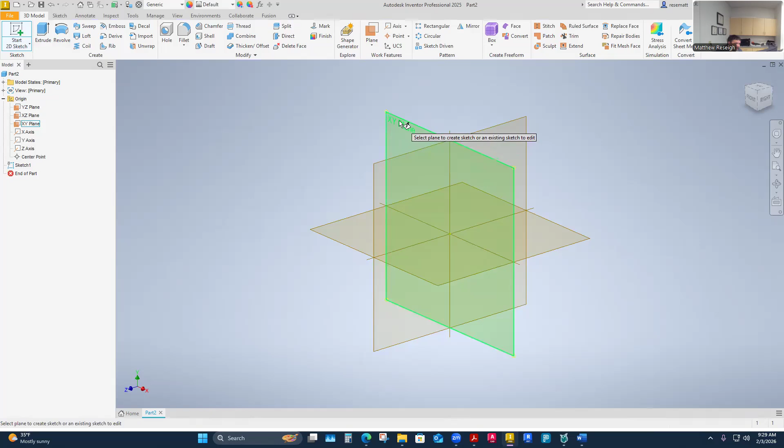I'm looking for the XY plane sketch. I noticed that when I do that, it just started that sketch, and then my planes turned off. So that's cool. That's great. Just so you identify where in space you're modeling. I'm going to do this rectangle, which is just a 1x4 rectangle here. So four in this direction and one in this direction.

So 1 inch is a really small coupon, by the way. That's not very much material. Usually when welders practice, it might be something longer, like a 4x6 or a 3x6, and then they'll trim it down a few times. You can still weld this, but I'm going to constrain this in space here. I don't think he does this in his video, but this is what I always do. I'll do a horizontal constraint to middle, vertical constraint to

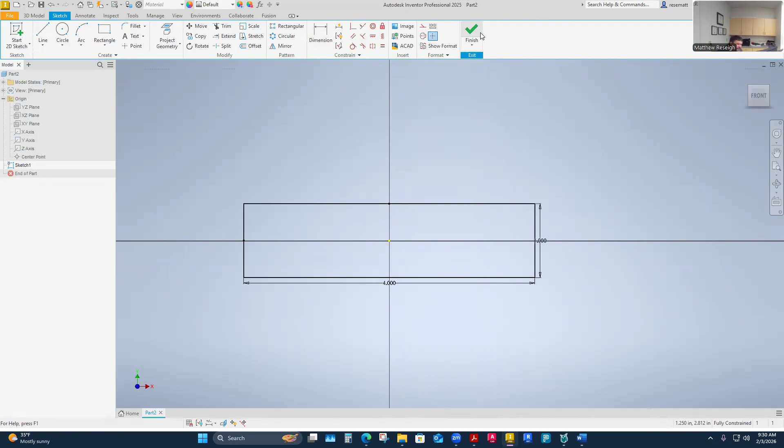there. And that's just a 1x4 rectangle part. I've constrained it, finish it. He extrudes it 1/16 of an inch. Really small part as well. It's like sheet metal. So he just extruded this 0.0625. That's 1/16 of an inch. I'm going to put this centered over my planes here on my extrusion, so my sketch will be buried in the middle. And just so you know, this is 1/16 of an inch.

So sheet metal, and we talked about this a little bit in some of our chapters, at 3/16 thick is kind of where sheet metal turns into, I think it's technically maybe 1/4 inch, like 0.25 in thickness. From that point on, maybe the steel distributors think of that as plate, and maybe 1/4 inch and under, but really 3/16 and under is sheet metal, and it's definitely formed differently in manufacturing.

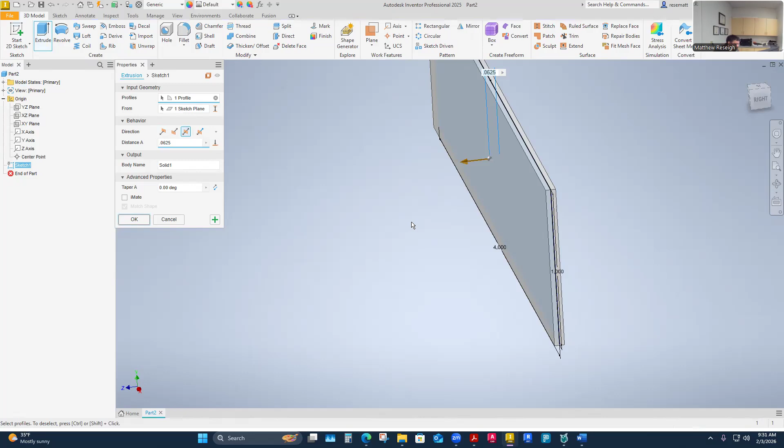For sheet metal, I can get even different finishes. And so he's in a sheet metal realm here, even though we're in a standard part. When I see something that's 1/16 of an inch thick, that is sheet metal to me. It's really thin. Okay. Why this matters is because if we think about welding, these things matter. And so he just makes this one part, and then he saved it. We'll just save this, this is in week 4 for me.

Just so you know, week 4, I have these 3 subfolders, which is, I think I've mentioned, how I build my folder structure. I go into my week 4 and I have an assemblies folder, a drawings folder, and a parts folder. Anything I do in week 4, we'll have several different parts. I'll just dump them all in the parts folder. All my assemblies for these little weldments will be in the assemblies folder, and I'll have the drawings for each of them in their own folder.

So you get quite a few different assemblies and parts, and it can be kind of hard to organize or find which one's which. But I saved mine in my parts folder, and this was exercise. I just called it part 1. I have to just change mine slightly, put some designation so I don't lose it as well.

But part 1 for this, and then we're gonna open up a new type of assembly, and it's a weldment. Instead of the standard assembly, we're gonna use a weldment, although it's very similar. This is an ANSI weldment. Create it. It doesn't look too much different, other than by default when it comes in, you'll be on the welding tab. So it adds that one tab above your ribbon menu.

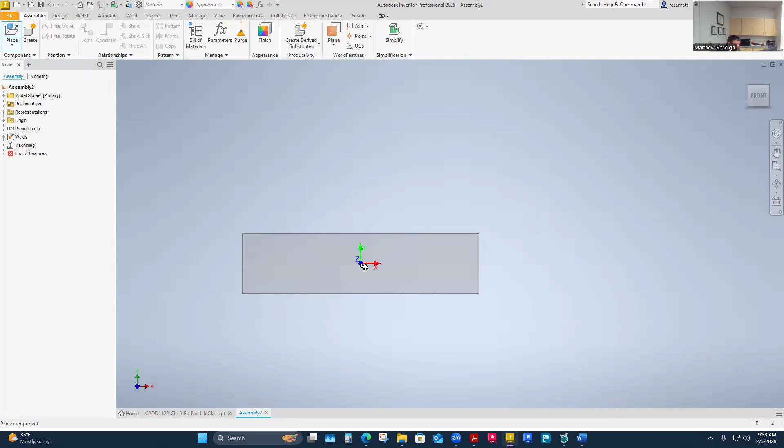We end up placing 4 of these because he ends up making kind of 2 different weldments in one here. So I think he places 4. If your assemblies are like mine, I like to turn on my shaded with edges here. He doesn't ground and root anything or even place one. He kind of keeps them free floating in this model space. That works for me too.

What we want to do is just join them together to make a T. And so he makes T fillets out of here. And so that's why I feel like the next thing you should think about when welding is kind of the joint designs. And this is considered like a T joint. And then maybe, if you wrote it out, it'd be like TE joint or something. T joint.

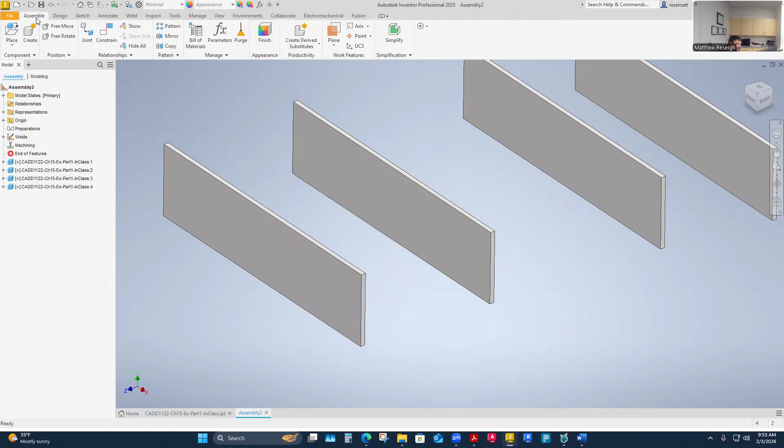Why do I need 4 of them? Because I'm gonna weld them. We're gonna act like we're gonna weld these together, and we're gonna make like 2 coupons, is what I kind of call this. So what I'm gonna do is I'm gonna assemble these. I'm gonna constrain these, and so I end up putting like one of these edges.

You can pick any of these parts, by the way. So I'm just gonna pick one like skinny edge here, and I'm gonna mate it to the face of this one. That's essentially creating the T joint configuration. Real standard way to join metals is like to T them together, just butt one into the other, but one's face to edge kind of. That's a T joint.

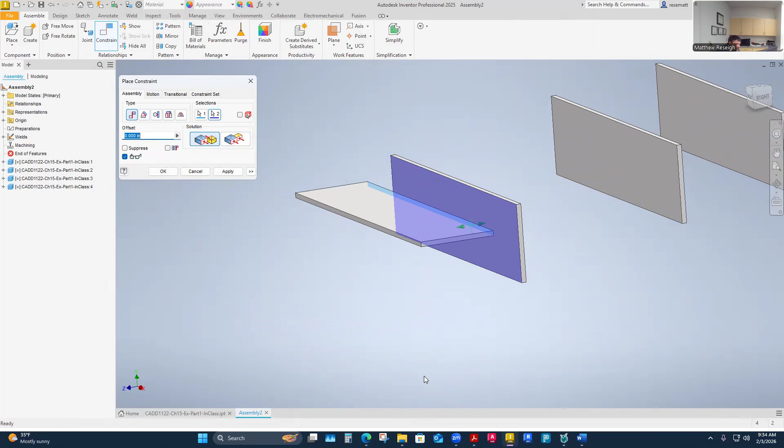Say okay on this one, I'll apply it, and then we just line them up end for end here. Of course, they need to be flush. I'm going to change that solution and say apply. And then he aligns his with a dimension. I just end up aligning mine plane to plane here.

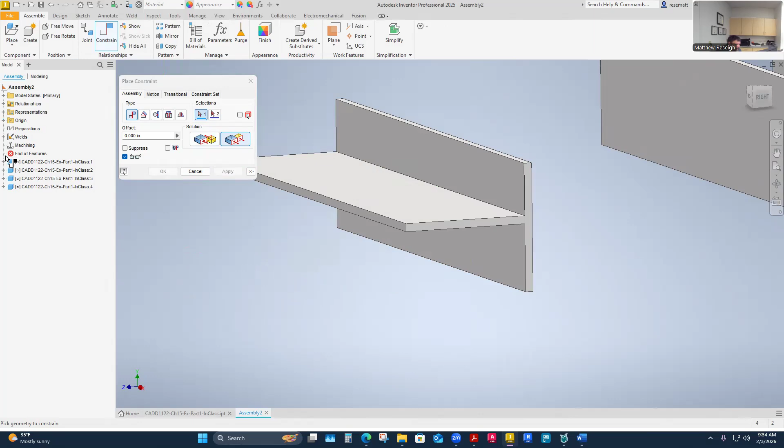So I think the way I've done mine is, let me just blast that. It's just whichever parts I'm working on, which I can identify really quick in my list. This one, maybe I just want to know its origin planes, and this one, its origin planes. And I know I have a plane to plane relationship that will align these up centered. Like there's my center plane there. And I'm going to apply it to this one here. That's the center plane of that one. That's just because I constrained them in their environments that way.

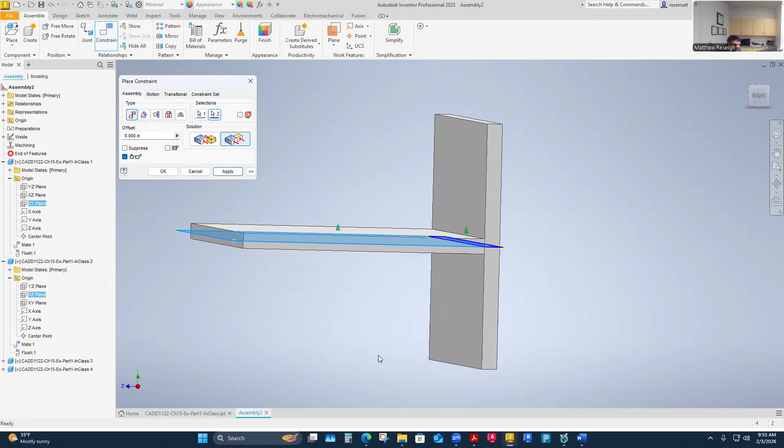So I have these, maybe they're going to be flush. Got it. Okay. I think he uses a dimensional constraint. I just chose to use a plane constraint, so it's actually centered. So it is like for my last constraint, that is. I identified from my list which ones are which origin planes I need. And I'm just constraining this plane. It's like the thickness plane right here. I have a center plane in this one right there.

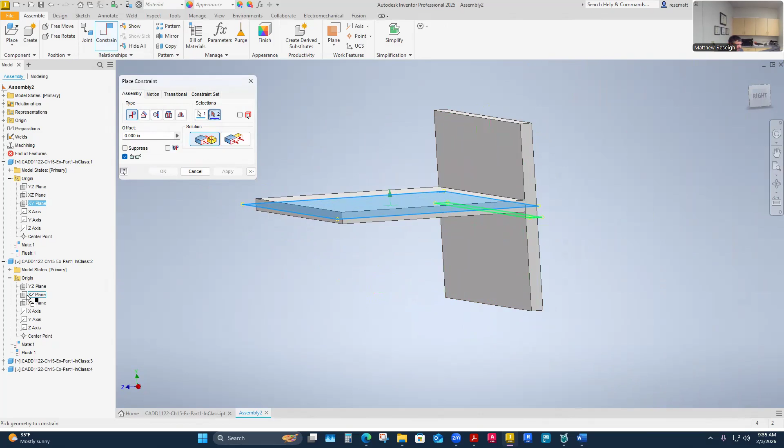And then if those are flush constrained, I can just hit OK. And now these two are constrained together, but they're not constrained in model space, right? Oh, try the other solution. Always say edit that. Like if you always get the conflict, just say edit and then go in and choose a different solution. And it probably is just needing to be the opposite one that you have. Yeah. Don't delete those. Just edit them.

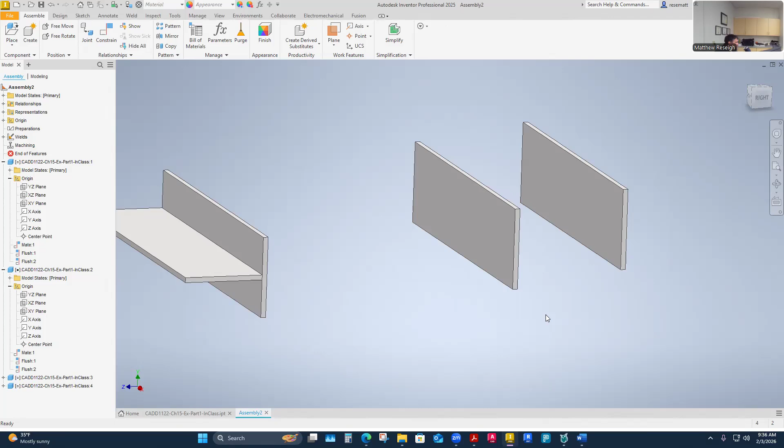It'll even allow you to force it to constrain, but then you'll see that the constraints will blow up and it'll make you want to have to fix them. So you could still apply that, even if you know it's right, but you're going to fix another one to actually make it right. You can just force a constraint and then fix the blow up, if it's conflicting another constraint and you want to change that one instead of this one. I mean, that gets complicated.

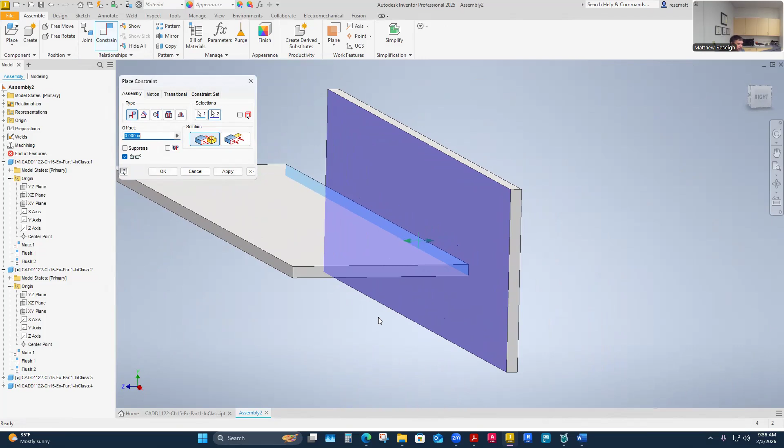And I'm gonna do the same thing. I'm gonna make the same little configuration with this set of coupons. This is what a welder would do in their little booth while they're practicing. They'd have to cut flat strips like this and then create the joint they want to practice welding. And this is a real common joint that welders practice. Like some of your first welding might be this, it's going to become a fillet weld, is what we're going to call it. I'm going to apply this. It's a T joint, but we're gonna perform a fillet weld.

And I'm going to line these up end for end flush, apply that. And then I'm going to do my constraints here. A lot of times I'm expanding out my selections here. If I right click and say collapse all, I can itemize my parts a little bit better and then expand the ones I really want to work with, these two.

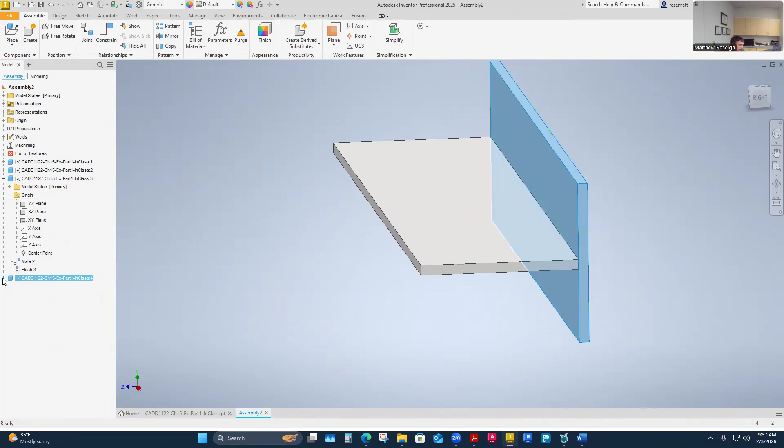So I have the planes exposed. And now when I constrain, I can look for the one to pop up. There it is, that one. I want to constrain it to this one right there. I want it to be flush. So okay. So I've got two little weld coupons that are T joints, but we're going to do a fillet weld. And that's just something you have to learn.

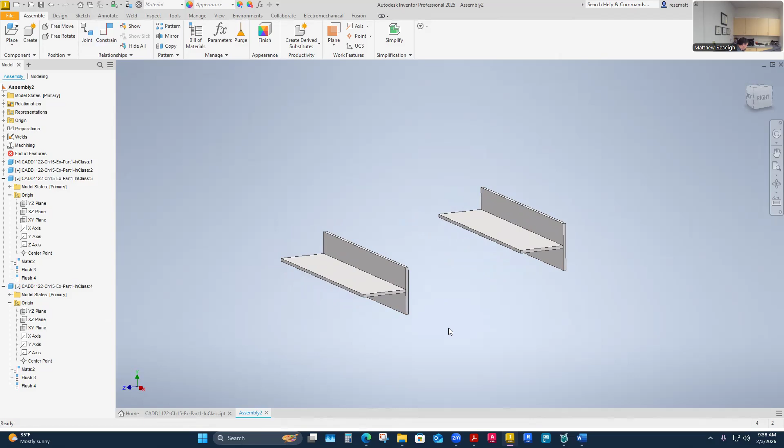That's probably a new term; unless you're a welder, you maybe haven't heard of a fillet weld. I'm just working with standard terminology. I don't know why they call it a fillet weld, but they did. I'm going to fill in this corner, I guess, but it looks like a fish fillet, but it's fillet. Yeah, real common entry level weld.

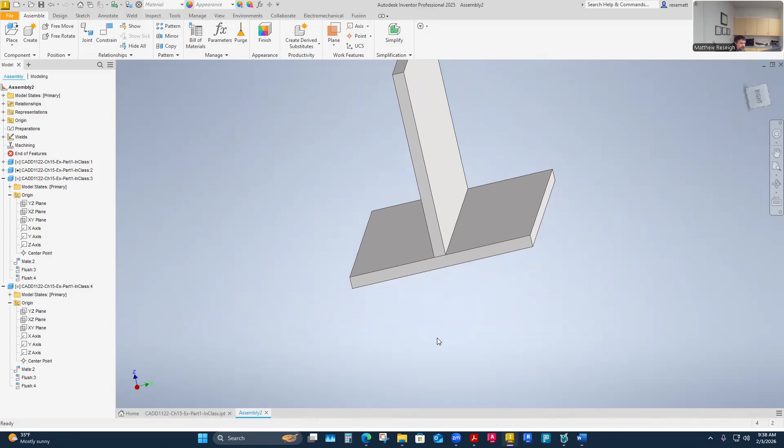And so a fillet weld goes in here on these corners, and it just joins these two together. And when we weld that together, and he doesn't explain this in the video, you have some parameters when we set a fillet weld. So we'll open that up and see what it is. A fillet weld is when we put a little weld in here, join these two together, almost like a caulk bead, if I wanted to glue them together.

Yeah, so what you have in a weldment is that weld tab. So open up the weld tab. We're just going to pick welds. Let's see here. Yes, I left click welds. Then your ribbon menu kind of gets activated there. It's almost like you're in an edit mode here a little bit. Everything else is grayed out on my model tree, and it has a weld expandable menu there.

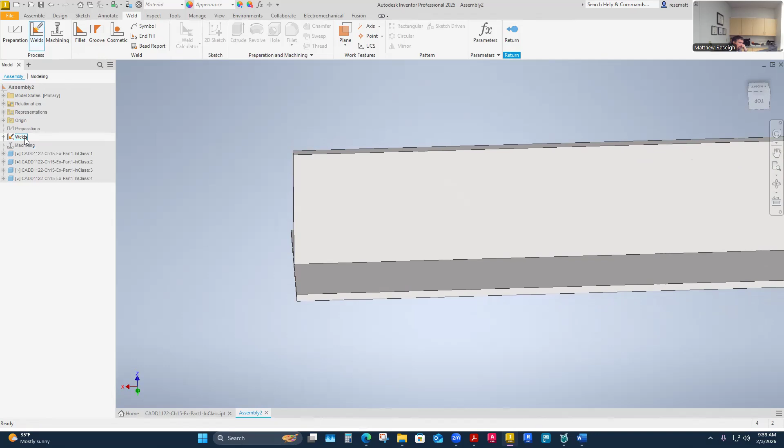Every weld that I apply into an assembly like this is going to be categorized under the weld menu here, so they're kind of like individual components to this assembly. But once I pick weld, I can pick what type of weld. Here's the weld type. Obviously, there's some preparation I can do and machining, and we will get into using some of these. This initial fillet weld, I don't have to do any prep other than put the parts together, and the joint is created for me.

So I'm not going to do any machining. Recognizing what kind of weld is critical. Under groove, maybe it's a little bit more expandable. But really, they've been able to synthesize this down into just a couple different weld types here, which is cool. I can create a lot of different welds with just these few simple inputs. Cosmetic is my least used, and he does one, other than maybe for information in a model.

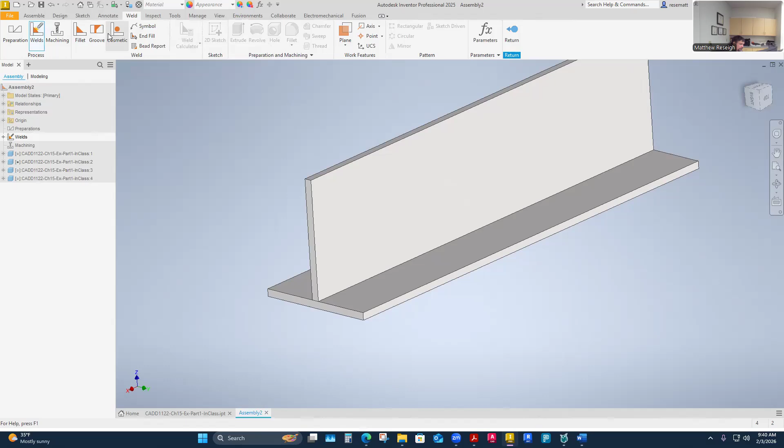But we're going to do a fillet weld here to join those two together. It opens up this dialog box, where now you have to start knowing a little bit about welding to apply this. So what we have here is the bead, and then we have all of these parameters that we can put in here. I don't know what he uses in his book. Does he use 1/4 inch? Yeah, I think a 1/4 inch fillet.

So my selections are just the faces for a fillet weld. Where am I going to apply the weld? Well, it's going to be on this piece and then on this piece, and it's going to join those two together. So I have two selections here. Selection 1 is ready for me to select, and I don't know what your default is.

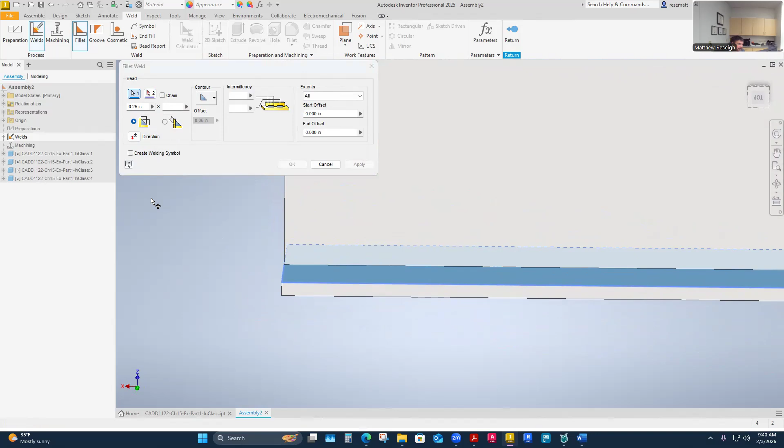Mine maybe is what I'll use last, but I'm going to select this as selection 1, and then I hate that this doesn't, like you'll notice with constraints, it automatically jumps over to selection 2. The weld doesn't. You have to come up here and select the second face. Well, it's this face here. And then it applies whatever dimension you have in here. There's a 16th. It's going to apply.

And so what you're actually applying here is what we call the leg length. If I hover over there, it says leg 1, and this one says leg 2. But I do work this dialog box kind of left top down to right. So a fillet weld is usually designated by its leg length.

And that's not real clear, but now that I have a little weld showing up here, it's actually from center right here where the joint starts out this way. This is the leg length of the weld. And then it's leg length this way. So that's why they have two different leg lengths here. You can do unequal leg welds. Maybe harder to do with one bead; to make it unequal leg I have to kind of force the weld onto one or the other.

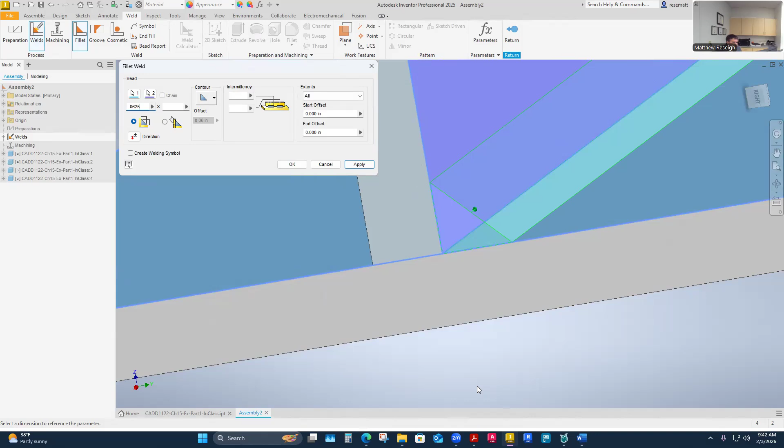But really common unequal weld lengths are when I'm stacking multiple welds together, because the welding procedure will say how much weld this needs to have on it. And they'll usually call out on a fillet weld how much leg length it needs. So for really thick materials, it doesn't mean I make huge globular welds as a welder. I just do more like stringer welds, these little straight line welds, and I layer them up like shingles on a house.

So a welder can sit there and layer welds to make wider leg lengths. Multiple passes is what that's called, yes. Thicker materials require that. Thinner materials do not. And here's my rule of thumb that he doesn't discuss here at all. Generally, when you're welding stuff together, a good rule of thumb is that the leg length should match the material. It's not always that way, but anything over the material thickness in leg length is over welding the material.

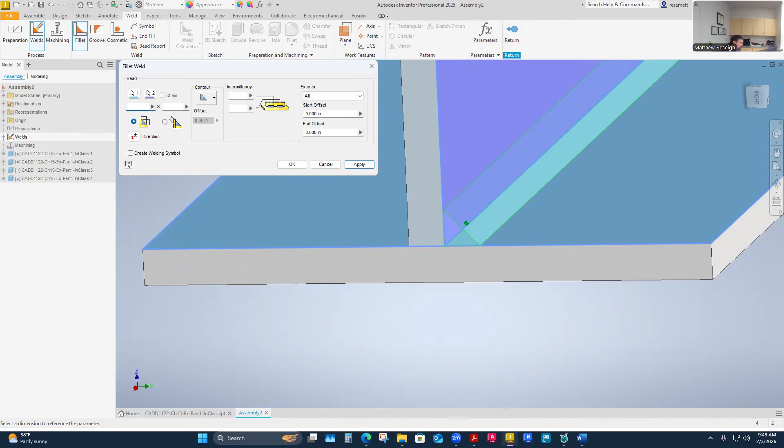So in this case, we have 16th inch thick material. He's applying, I think in the book, a 1/4 inch weld. This would be a situation where design and drafting made a mistake. If they delivered this down to the shop, this would be over welding 16th material, because he's having you put in a 1/4 inch weld, right? Or is it 1/8 inch? I think he has a couple different welds in here. Let me back up a little bit. The first one he does is 1/4 inch, right? Yeah, 1/4 inch.

Yeah, there's always a caveat to that rule. My general rule of thumb is to make your fillet weld leg lengths match at least your material thickness. So in that case, this should only be like a 16th inch leg length, but that's okay. He just puts in one parameter there, and then he has the contour be flat.

And this is the other thing that I like: in a metal welding environment, the weld inspectors are going to make sure that the leg length has been met. They have a little caliper they can put on here and measure that leg length. A weld inspector will come on with these manual tools, apply them, and see if the leg length matches. And then they'll also check that there is at least like this.

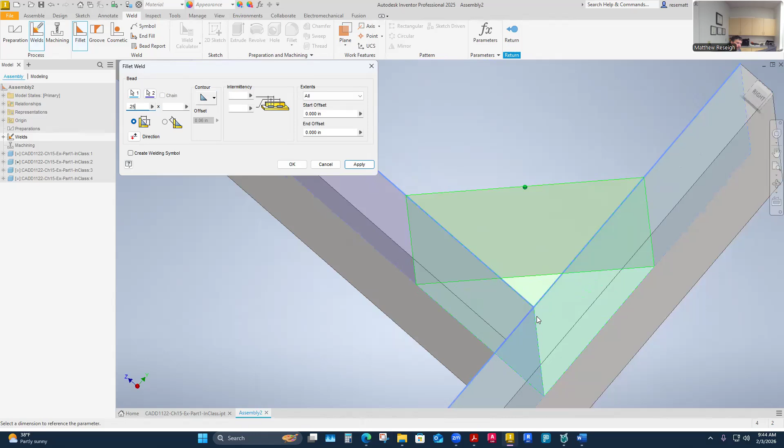They call this the throat of the weld. From where the weld joint is up to this surface right here is called the throat of the weld. In a metal environment, they need this to at least be flush like this. They don't like the throats to be concave. So they make sure that your leg lengths are the right length and that the throat is at least flat like this, triangular.

They will allow it to be convex to a point, but there is a limitation on how convex it can be, because excessive throat can cause material failures, not weld failure. Your weld is this huge bead, but its excessive throat thickness causes undue stress on the material, and it does lead to material failures.

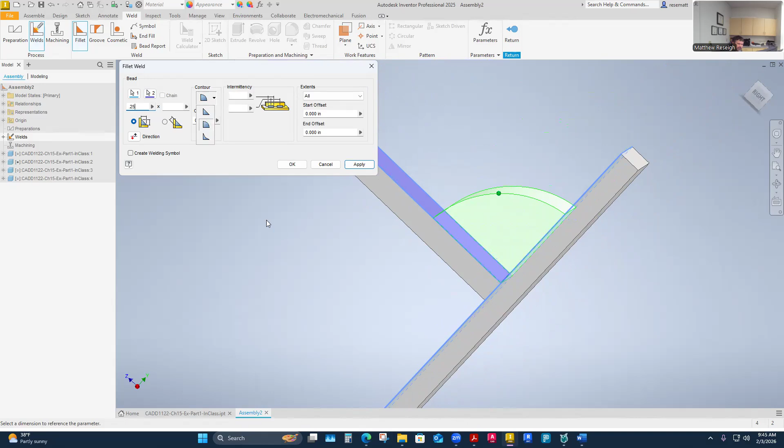With plastics, I think this convex contour shape is maybe more common in a plastic welding environment. But in metal, we call it excessive reinforcement. For a lot of metal welding, if I was showing them visually, I'd probably show them at least like this. And there would be rare instances where I would show a concave.

Usually the welder can't really control it, but they can control it a little bit. They have to be aware of it, but a welder's usually going to shoot for just slightly convex, so they can avoid a concave finish that could potentially disqualify a weld.

But what I'm saying is there are some situations, like I think of dairy equipment. Think of the dairy industry and a cold fluid in a stainless steel container. They don't like to have big weld beads in there, and they will polish those out smooth. In food processing or other applications, sometimes the inside of stuff has to be like no cracks.

We don't want any places where bacteria could seep in. But then we don't need the structural integrity because maybe the design holds up the integrity better. All I need is a sealed weld, and then it can be polished out really smooth and clean. And then it does end up having a concave profile, but it's more for sanitary reasons.

Kitchen sinks can be that way too. There's not a lot of structural integrity we're trying to get, just bacteria traps eliminated. Sanitization is more key than structural integrity maybe, and so there are reasons why. I say it's cool that they have these options because I can kind of show that profile.

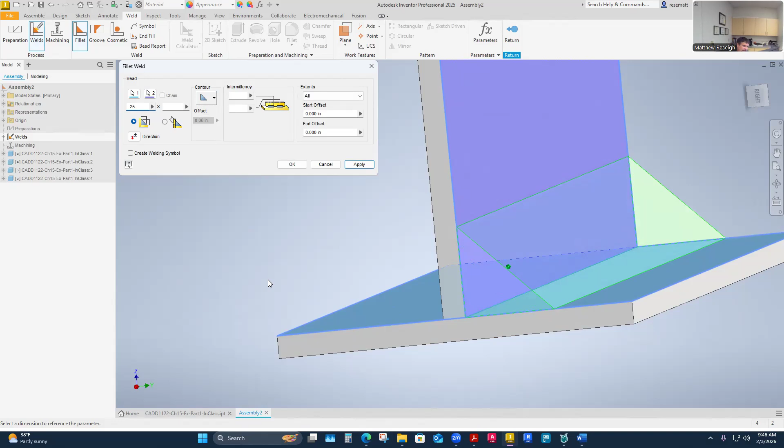I'm going to pick this one because the general rule of thumb is welders don't do convex welds unless there's a real good reason for it, and it's more cosmetic. Okay, and I think that's all they do here.

He doesn't worry about any of this other stuff yet, but we can set up how long the weld is, and how to stagger those little weld sections, and we can even offset it from one end to the other. That's sometimes critical in I-beam situations. There are reasons why I wouldn't weld out to the flange, I can ruin metal. So there are reasons why I can change all the parameters of this weld and the direction of it.

Yeah, this is kind of an equal leg fillet, I think that's what this is. This is selecting right here. I think this is the throat measurement.

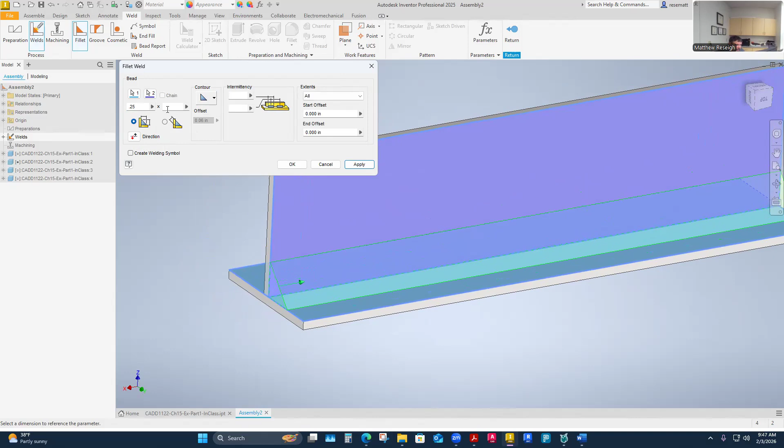If I want to specify the weld by throat measurement, like I just said, that's what that would be, the throat thickness. I'm doing it by leg length. And I think even if I don't apply a leg length dimension, it puts it in as an equal leg length. So if I put in 0.25 there, it's an equal leg length, but that's where I could specify an unequal leg length.

And I think this is it for this one. He hits apply on this. And then by default, maybe yours, hopefully like mine, my default does show it looking like a weld. However, it showed the best default.

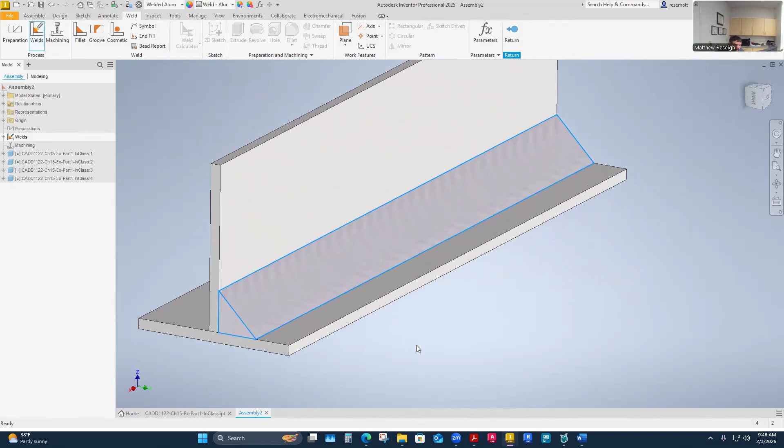It's calling it a welded aluminum 6061. 6061 is a type of aluminum, so this isn't necessarily what this is. I haven't even really specified what this material is, but I think the default in a weldment shows it as aluminum just because it's the only property they have default set that shows what a weld looks like a little bit on top, like this, with little ripples in it like a weld does have.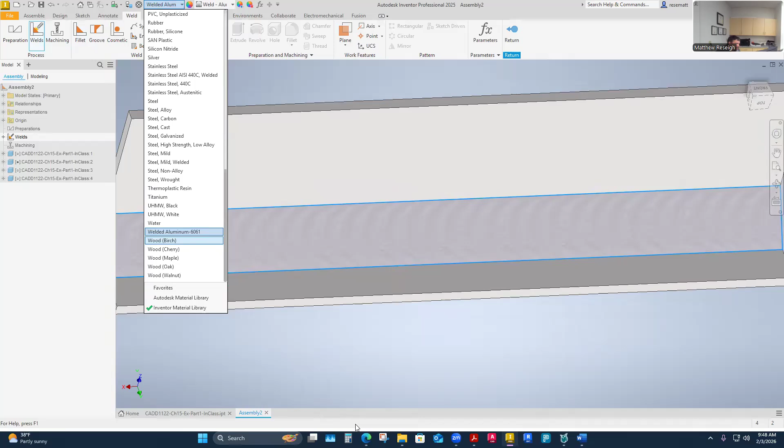And that's just the freezing and cooling cycles of the weld as this person's welded along, which causes ripples. So I'm going to leave that, even though maybe I would need to be more careful here because that considers that this is an aluminum weld.

But I think, I don't know what the next weld is. Still pretty good, I think they just do an 1/8 inch one, maybe. Did it end up being an 1/8 inch only? Yeah, I think the first one was actually an 8th, right? No, quarter. And then he does an 1/8 inch convex right here.

So we do another weld. This one ended up landing right here. This is if I expand this menu out, here's my fillet weld one. And I'm still in the weld, still activating this. I don't go back to the assembly until I return, and then I'd be back into where I have access to all my model parameters in the assembly.

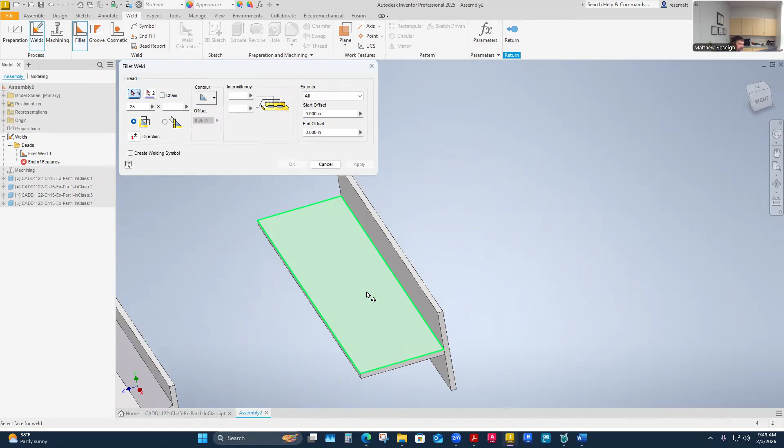So I'm gonna go back into welds though and do some more welding here. Maybe another fillet weld. And we're gonna go, this face is one, second face is two. That's the annoying thing about me, just remembering to select the other face. I think he makes this one just point.

And the other one, but the same side. Yeah. And then I don't know if he changes anything. I think he just changes it to like a convex weld here.

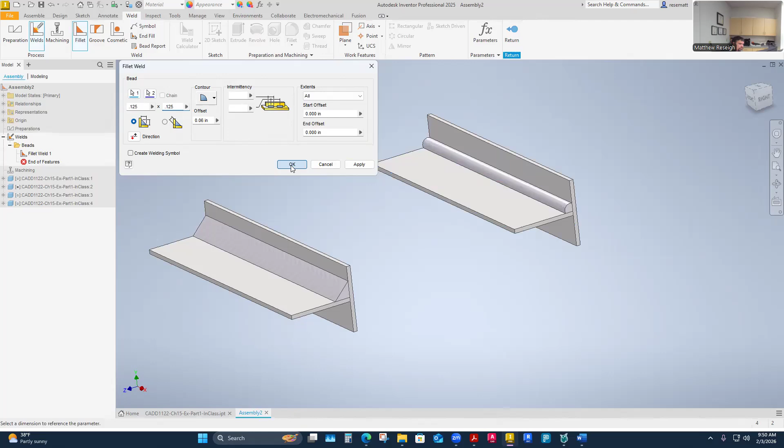In his video, he maybe shows it looks like he has an offset of a 16th of an inch. I'm not sure if he did that. I think that's all he does to this one. He says okay, so there's a difference in the convex weld, a little bit shorter profile. Really, it almost looks like a bead of plastic, but severely convex.

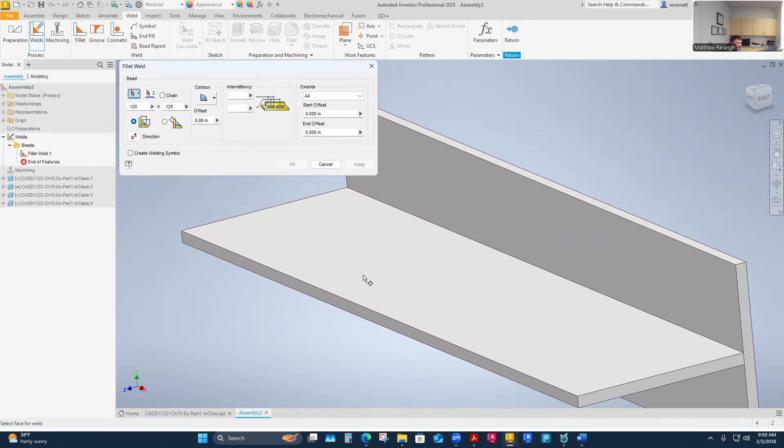Yeah, but yeah. Oh, maybe I don't know. Probably just an order of operations thing. So I think the biggest thing that I feel, if I undo mine here, like the biggest thing I always fail at in this is just remembering to toggle between your two selections.

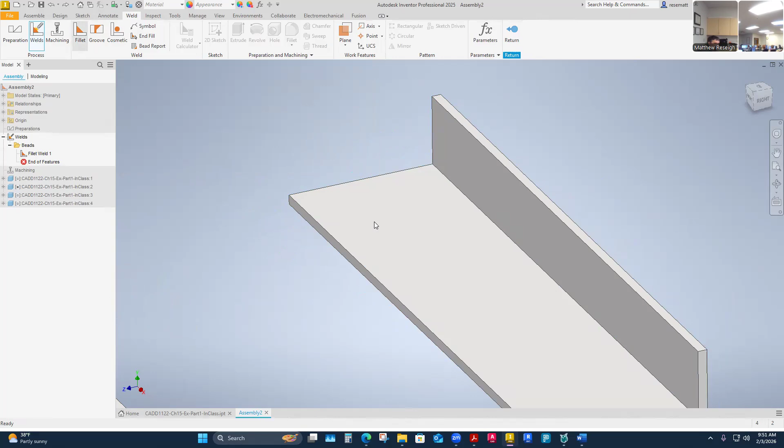Yes, because if you select this as one and then you say okay, it won't even let you if you have them wrong. But, oh... convex, concave. Oh, it won't allow you.

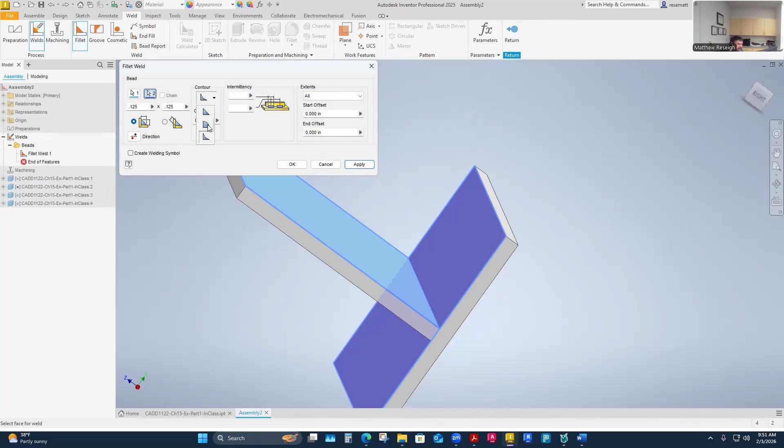It's like the reason why it says no is because it's convex and maybe it breaks. It can't, like with an eighth inch weld, and how much room it needs. It's like not compatible with this program, even though it probably could be done in real life actually. But it doesn't have, I guess, the dimensional constraints, so it makes it so it can't. It could do these other two though.

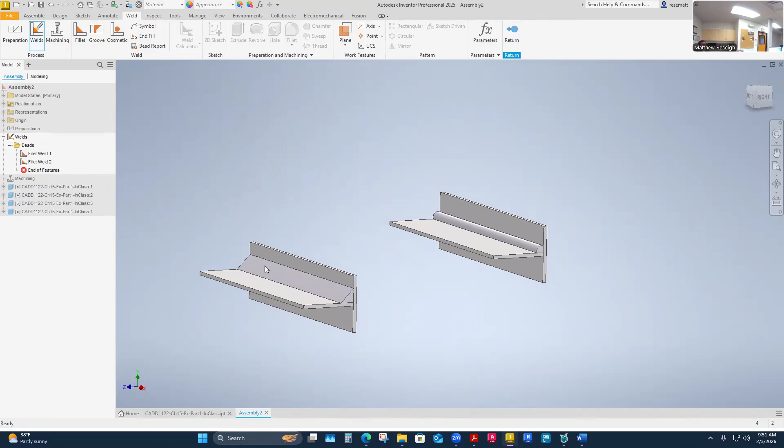Okay. Yeah, like oh well, it would be, yeah, I think yeah, if you did some, you could do some weld prep into it. We could actually V into those, that one, like we could V - yeah, like what you're saying is if I V'd into this a little bit and then applied a weld, then I could grind it all the way out and I would still leave some residual deposit of weld in there, right?

And that would be an application where I could create a 90-degree corner that is sanitary, but really maintains its... yeah. No, that's interesting. Yeah, it would be best specified with just a weld symbol and with a note in the tail, like a reference note saying grind to 90 degrees or something, right?

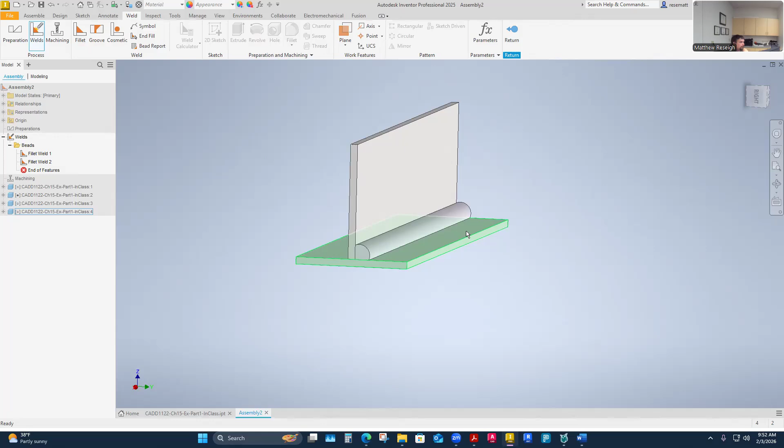You could, and so whether - you probably can't display that here. I think it ends up needing to, unless you do it as a cosmetic, which would be the option there. Even though the cosmetic weld doesn't end up looking like what it's going to look like, it's just like an indicator that there is a weld there, and then you could establish some parameters to the cosmetic weld that could be shared with somebody, right? But I think that would be definitely best specified just with the welding symbol.

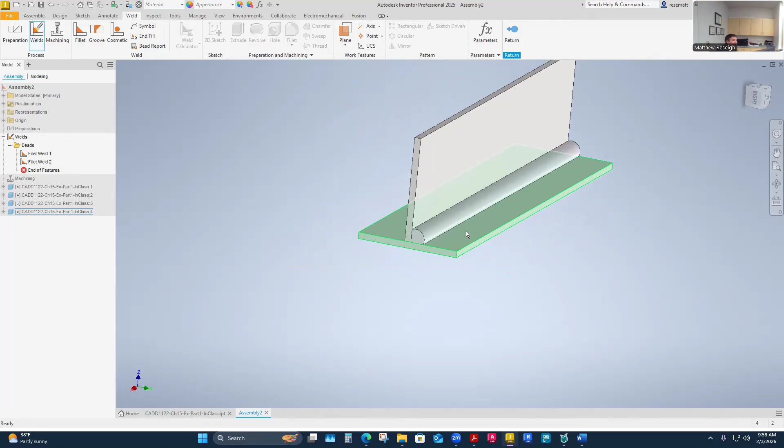Yeah, and actually, hey, you're right on the money though. If I V this in here and do some weld prep, you're actually falling into a groove type weld and not a fillet type. So absolutely, and we could do that and it would actually show as flush finished. Yeah, so we do some of those actually. So that's a good point. Yeah.

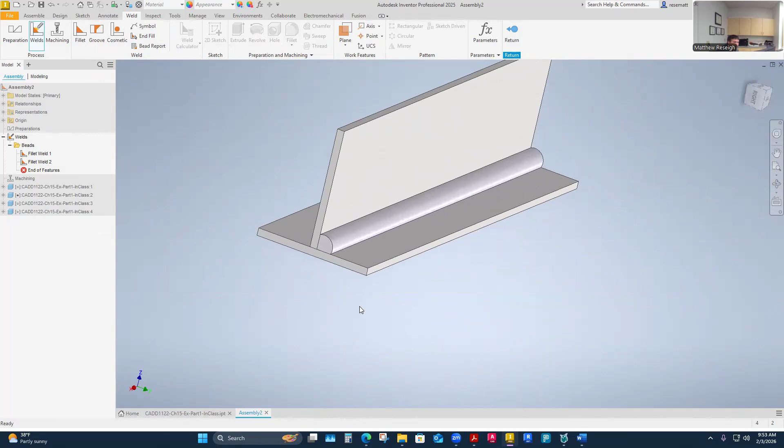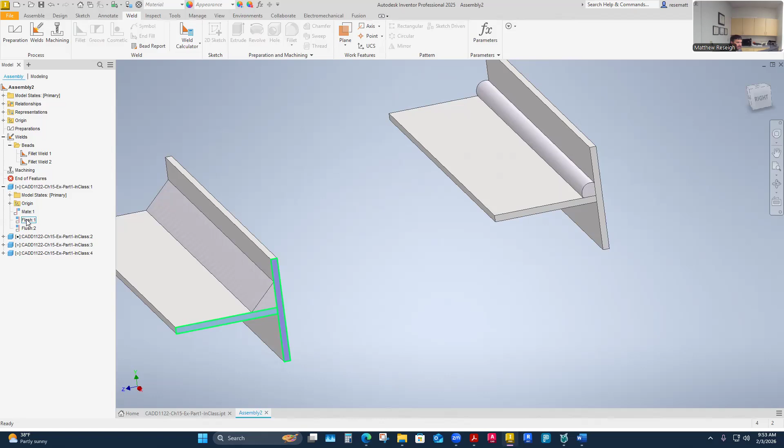Like on the end here, it's a constraint, right? Yeah, I have three constraints driving my parts. I'll finish that weld, by the way, so I'm gonna finish that one. Yeah, it would just be a constraint that you're missing. I have three constraints on all mine: face to face, flush end, face to face, and then center to center plane. So I've got three different constraints. 3D world, three constraints, checking.

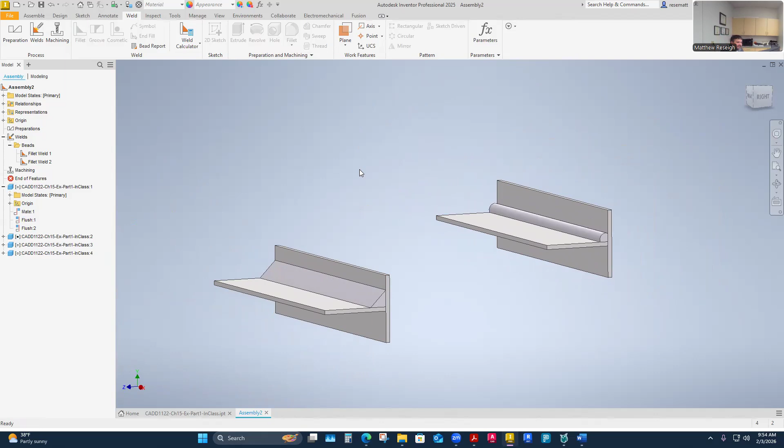Good thing we're not in the seventh dimension. I don't even know how to, I don't even know how to constrain, even the fourth dimension. Oh, good. Yeah. We can get a feel for that with. Yeah.

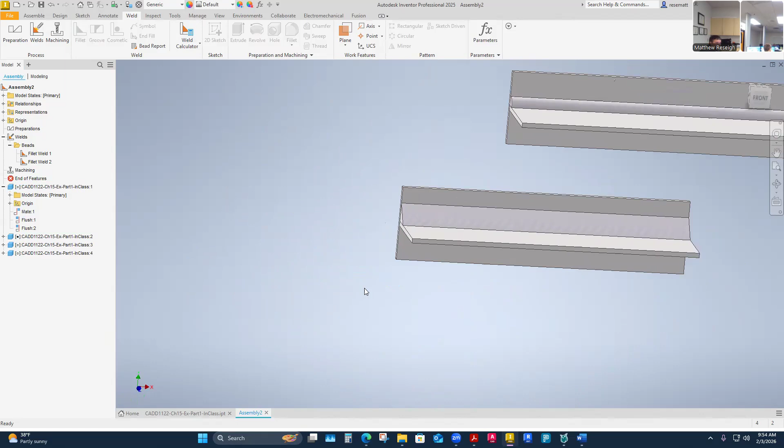He flips these over and does a couple more welds on this side. It is common that things sometimes need welded on both sides. Sometimes they need only welded on one side and then stitch welded on the other. So welding sequences get pretty particular about how things need to be welded.

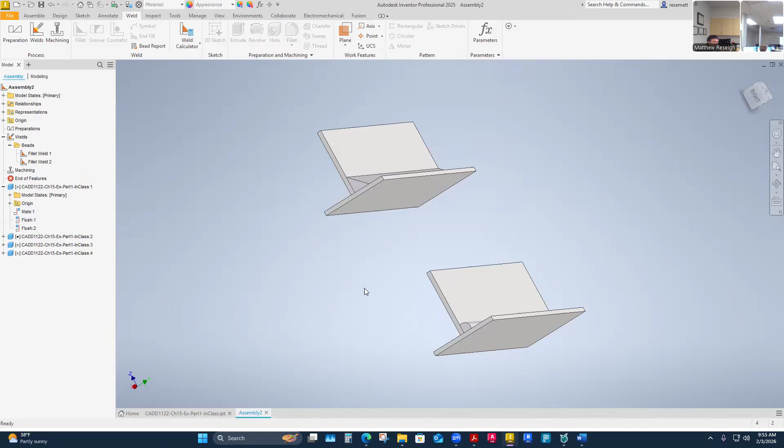What we've done here doesn't necessarily make sense to an actual welder, but it's fun to play around with the program and see what it can do. That's why I think the value is here, just getting familiar with this. We can try to make our stuff make more sense as we apply it to the other problems we'll work on this week.

So he just does a couple more. He does this side, I think. I don't know what exactly, let me look at the numbers. He does just more fillet welds.

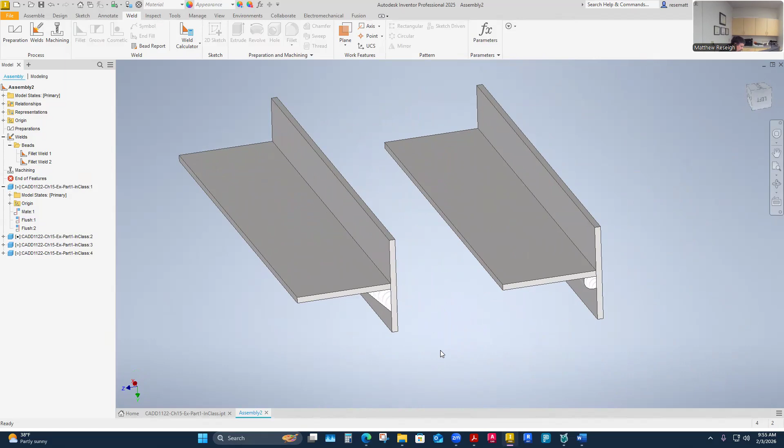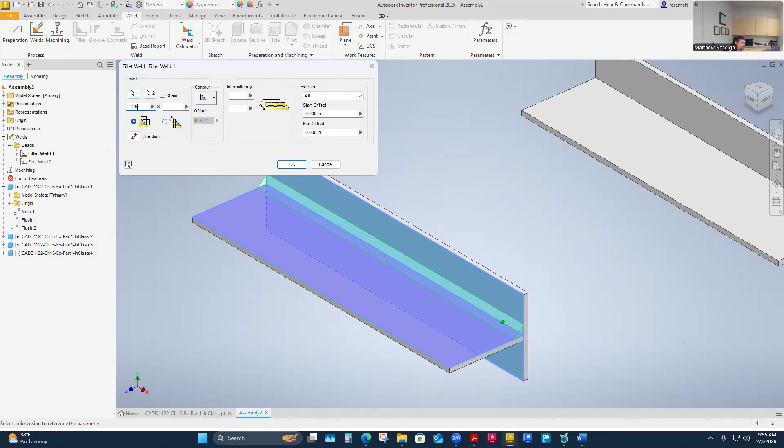Oh, he does like a 1/4 inch concave. I really think this first one I've got wrong, and it's easy to edit though. I think his first one was really 1/8 of an inch, one convex, one concave maybe. But if I edit this, you can go into here and edit it right from the model browser. I'm going to edit this feature. It goes back into that dialog box, and if I made a mistake, it's supposed to be 125. That's an easy change on this one.

I think that's what he does, because on this side of this one he does like a 1/4 inch weld. So he does another weld in fillet mode, and he does this face still to this face here. Then these become 1/4 inch welds.

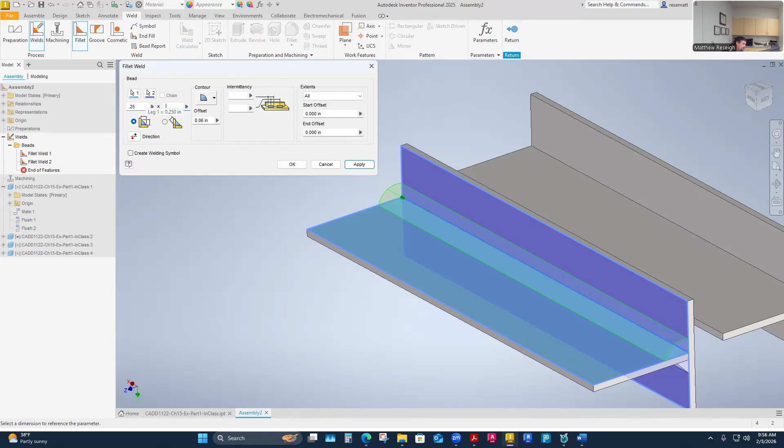He also does that concave profile here, I think just to show it. If he wasn't bigger, he couldn't actually show that. That's what the offset must be set to - that must automatically have set that. I didn't type anything, but his book shows it to you. He just okays on that one, so he shows a convex. Well, I could have hit apply and then another one.

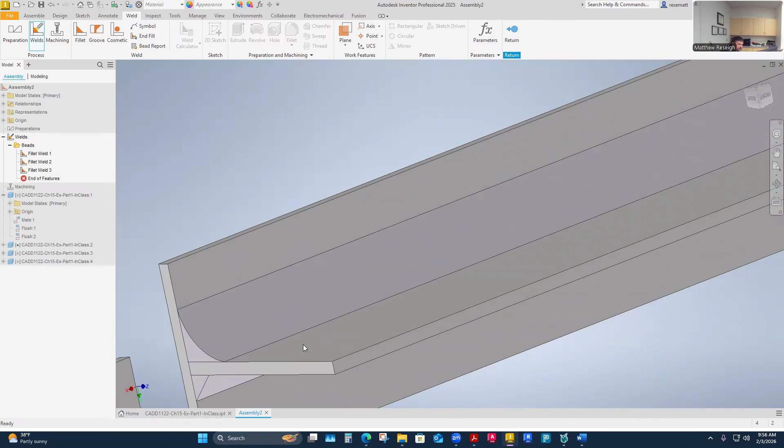It may look different from one side to the other side too, 1/4 inch. So then this other side here, what do we do? I can't remember what he does. Let's see - oh, he does the cosmetic one, which to me is more for information only.

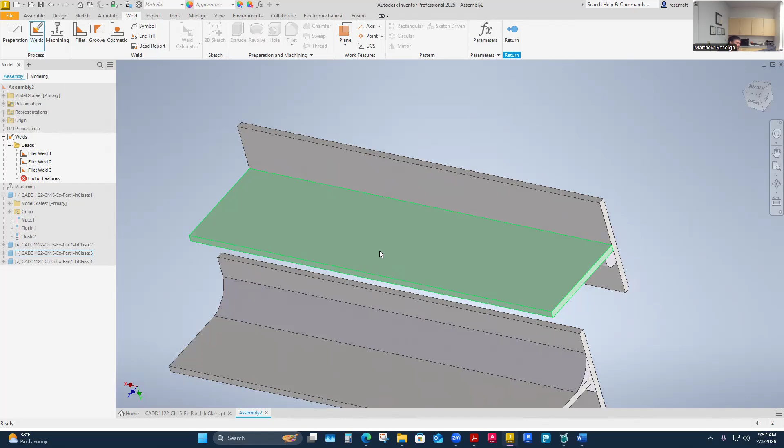This would be a way that I would not show the weld. I think if you look up why Inventor has this functionality, it's like a cosmetic weld. It's kind of like an edge or a seam, I should say. So in this one here, he applies a cosmetic weld to this.

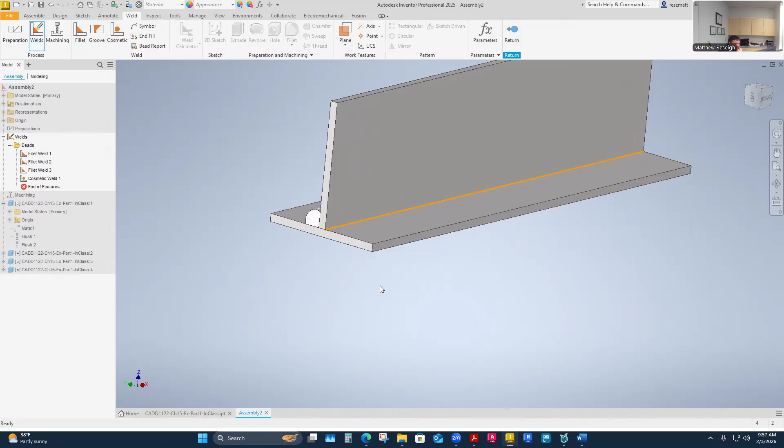I think he just left the area the same. He said okay, apply, and it just puts an orange line in there. But I think it's just to show that there is a weld that will take place here. I don't really know how - I've never used this cosmetic weld concept for any of my own design purposes - but it really just shows your model that something is going on there. It's a weld, like a welded joint, but it's not really showing the level of detail of actually applying the weld.

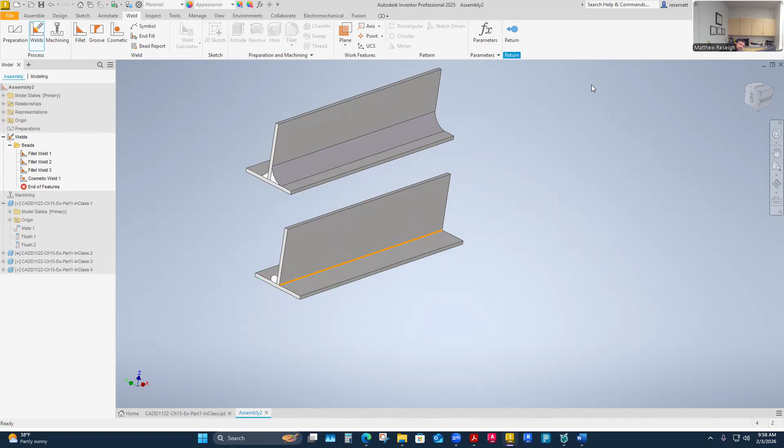It's definitely a smaller file size for one, and it's maybe a way to visually show that hey, those two parts have a weld going on there. Maybe on your drawing it should be an indicator that I should have a weld symbol associated with that. Maybe it's a way to track that. I don't know, but it is just a way to point out there's a weld there and not really call out much else, because it doesn't tell you what kind or anything - that's your weld symbol. It's just this visual indicator.

But does it go away? No, it stays there. When I exit that, I just hit return. Now back in the model browser - to me it's like a visual indicator on my assembly of where a weld might be. But on some metal parts that'd be all over every seam, so maybe that's too redundant. But I don't know.

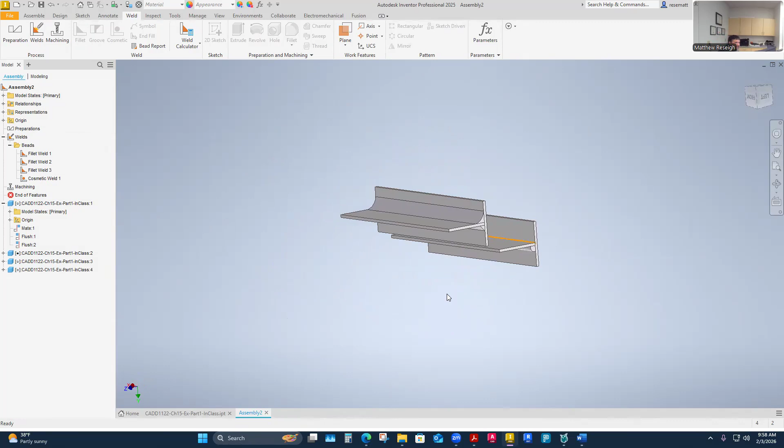Yeah, you definitely get that, especially when I teach hobbyists. Yes, but it is pretty common a welder will then start welding with their initials. If you leave them too long unattended, you will get some awesome creations. And it's kind of fun.

Because once you got a straight line down, just go ahead and... no, it is funny to teach welding because people just want to move on, but you're like, actually, you have to practice. You're kind of looking for perfection in practice. It takes a lot of the same thing over and over, right? So it takes a lot of practice. Yeah, it's exactly like learning a language. It really is just a practice skill, right? Super learnable.

He shows you the weld calculator, which is interesting. I think I would have to select the weld, but I think he says fillet weld calculator plane. It's not super common for me in my industry to have had to apply the welds in a weldment. So using the calculator is not something I'm very efficient with at all, actually. But I can see the point of it if I bring this up.

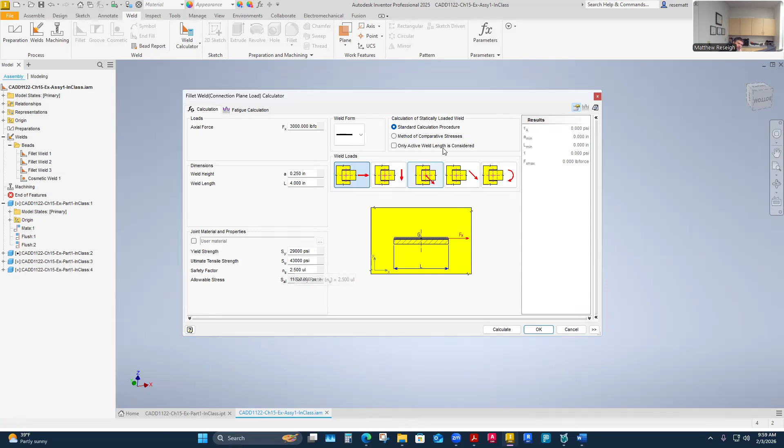Oh, I have to save it, so it'll give me the option to save mine. Mine's in assembly, so I'm gonna save mine in my assemblies file. It's like my chapter fifteen assembly. So I definitely need to save that file. And then it brings up this dialog box. This is just one of the many you could have chosen to weld calculate.

But I think you can see that there's some forces, so some engineering behind this. My question is, I'm not sure which weld this is evaluating. I have a bunch of different welds there, so I don't exactly know what weld this is calculating for me. Or if I have to select it, I don't know. I'd have to play around with this a little bit. He just opens it up to show you there's some engineering and some numbers I could pull out of here, but these mostly have to do with strength. I have a weld height, and a weld length is 4 inches.

Okay. I think in this weld calculator I should also be able to calculate how much weld deposit I'm going to make, and I could order materials from that. So there's some sense in this. I could explore a design and see how much cost is going to be associated with different material types. So if I was exploring different welding processes to save some money, could I use these welding calculators? Absolutely. I could explore design and I could also explore their strength and their loads.

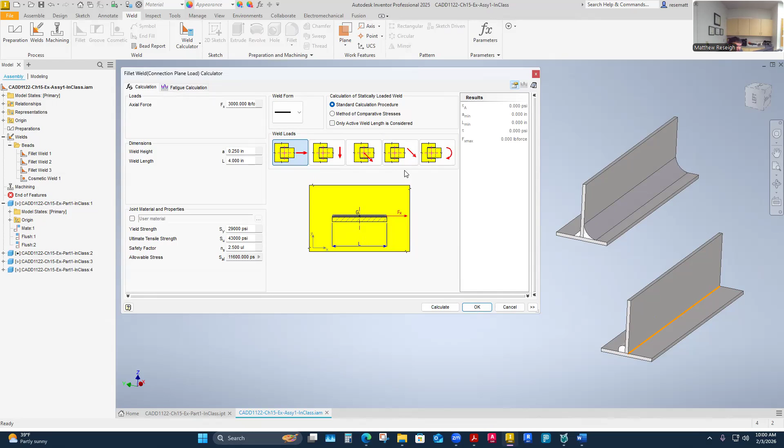So yeah, I don't know. It's just interesting. I just haven't played around with it a lot. There's a lot of different ways. I guess it depends on which type of welding I'm evaluating here. But for me to use that here is weird because I just have quite a few different welds going on, and I get most assemblies will.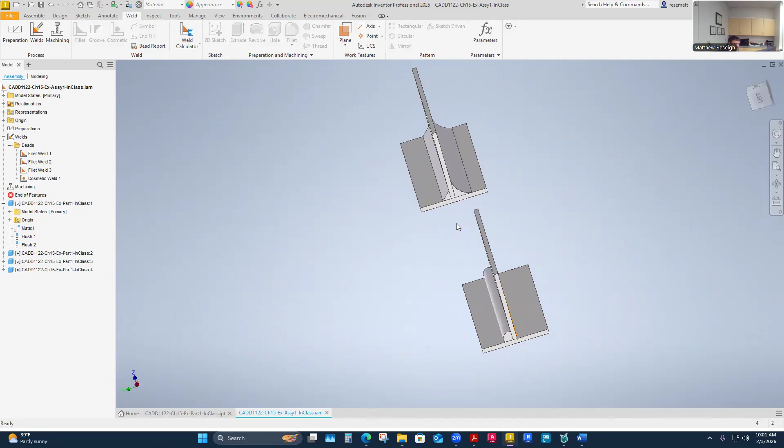But anyway, essentially these have been over welded. So this would not be how I'd want to send something to a welder. They would freak out. And that's what I mean. If you don't know, you don't know, and it's hard to judge someone's work on your drawing if you don't know the situation. So it's dangerous.

And I specifically worked in a place where they were stripping weld symbols off because they had just been raked over the coals by fabrication. Instead of just helping us all get it figured out, they were just stripping them off their prints.

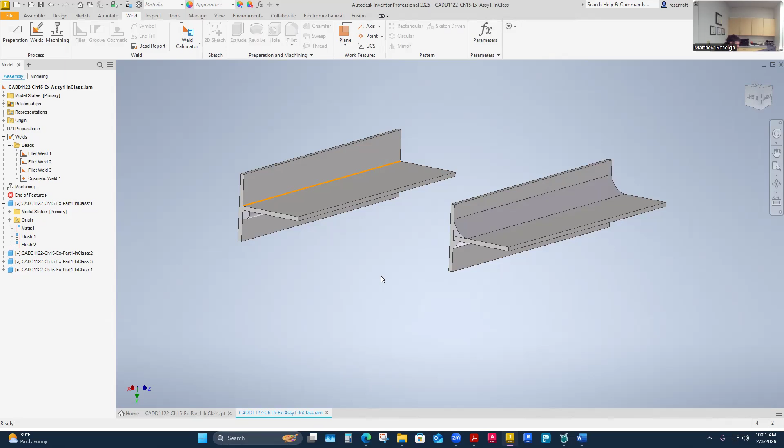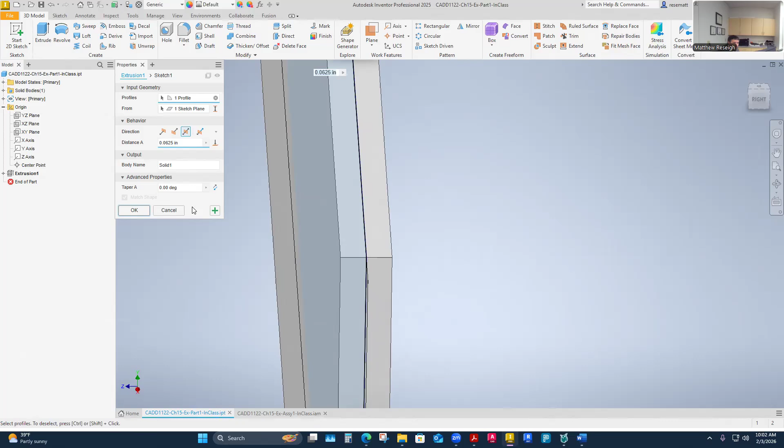Like these you cannot get. Oh yeah. Oh, I don't know. Well, it could be how you... yeah, one thing you maybe have not noticed is that on my part itself, when I did the extrusion, I'm actually centered over this way. Is that how yours is? Oh, okay, but that's not it. I don't know. Let me place a couple more and see.

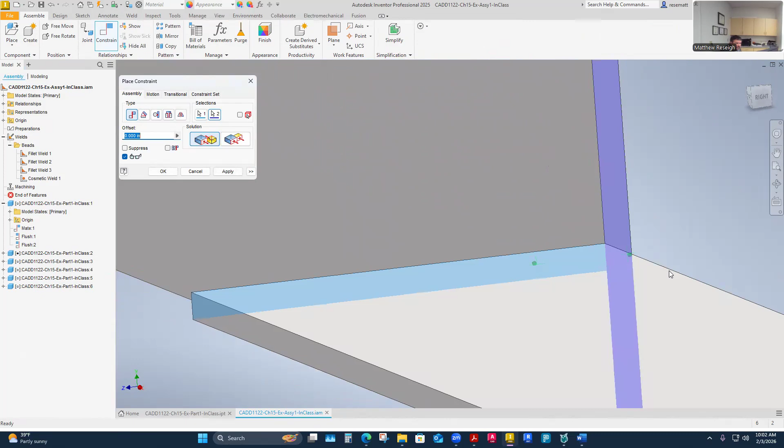I will place these in my assembly here just to see what I did different. So I had these two parts. I just went into constraints. I think I chose this edge to this face. Snap that. That's good. I said apply. And then I did the end for end here. End for end. I didn't like that, so I need to flush. Bam, that solution. Then I hit apply. And then I just did the planes.

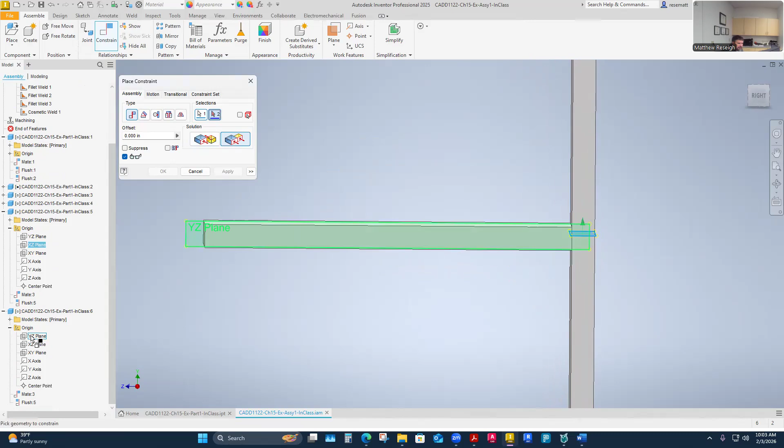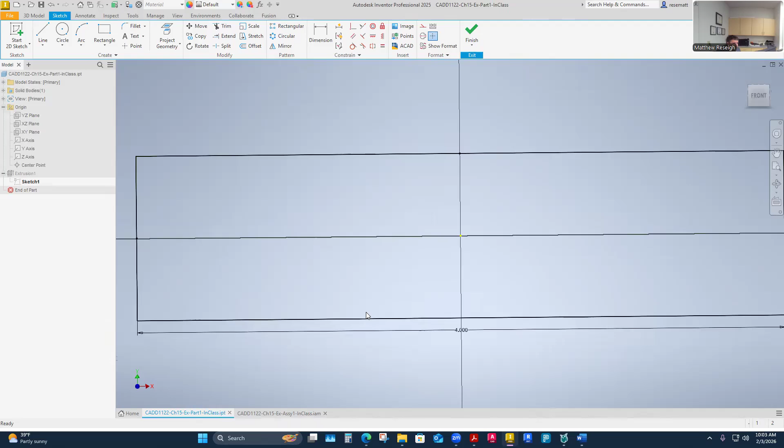So then I found their planes in the browser, which is really common for me. I look for a lot of plane alignment in my parts, really. There's the plane on that part, but I want to align. So there are different planes on these parts, actually. So if you don't have the plane on that one in the right place, I'll open that up again. It's where I constrained. If I go into my actual sketch, you'll notice I've actually centered mine over the origin, so if you didn't do this, you won't have the planes in the center either.

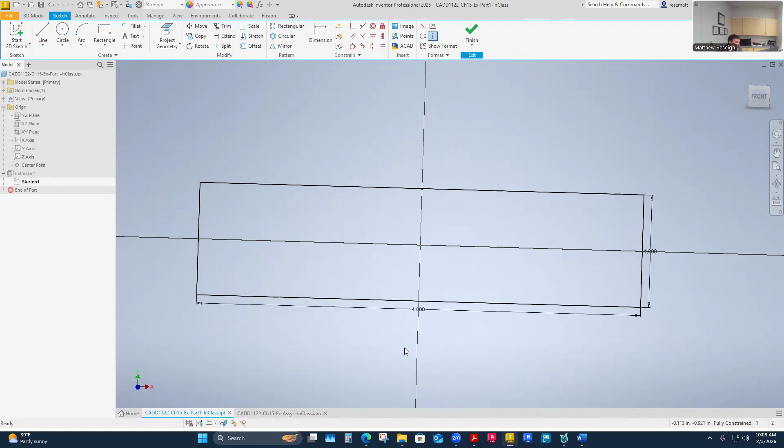You see me do this a lot when I have a simple part. I just constrain it over the origin. But when parts work off parts, I can't always do that. So I kind of mislead you thinking that I'm always gonna do plane to plane. I just do it when I know that my part had no relationship to anything, so I could just choose to center it over the origin point. If I have a part that's not in relationship to any other parts, I'll just center it over the origin point 9 times out of 10. And then it puts my planes as a selectable item in my assembly for centering it.

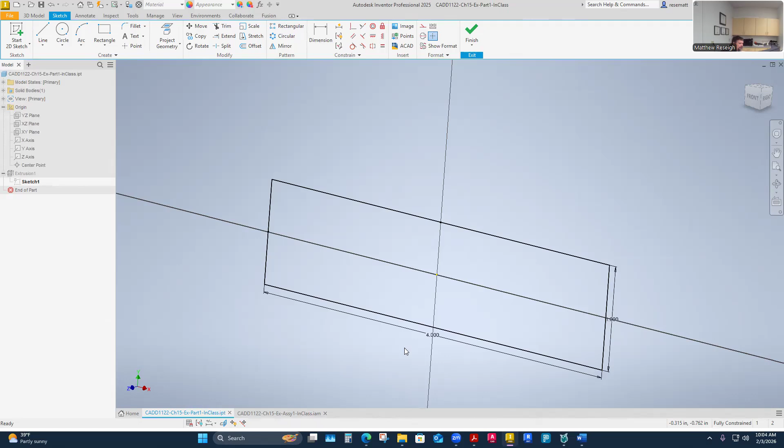And that's pretty common. But there are times when I'm working from an assembly and creating parts, which we haven't done much of, but we're gonna do it on the pipe support problem. Then I can't use that as much. I might be able to use one or two of the planes, but maybe not all three. And technically in this assembly, I didn't use all three planes. I used some face to face. You could dimensionally have constrained this too if you could have found center. He doesn't put his on center. He does like a 0.5 inch offset dimension, so his aren't even centered.

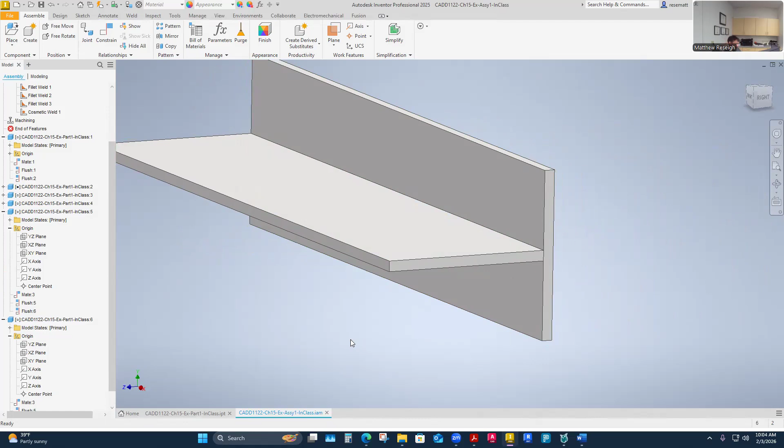Yeah, and this is all for that. So that's cool. That was exercise 5. I think it's just a matter of submitting the part and the assembly here. So I'll finish this. This is the end of that. Save it and upload those 2 files. Should just be one part file, one assembly.

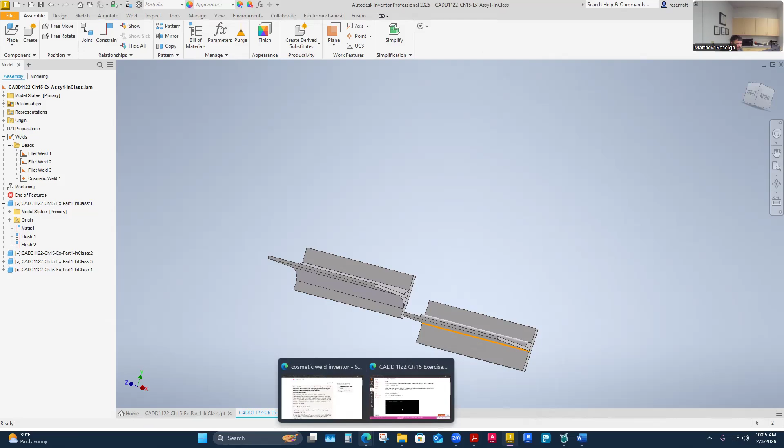It's a Weldment assembly. Notice too that even though it's called a Weldment, it still is just a .iam file. So there's not a different file type for Weldment, and you can't necessarily recognize them from just looking at the folders. You may have to open it up, and then it would have this weld tab here and you know that you're in a Weldment. And it's less common in real industry to even do Weldments unless you have real specific reasons.

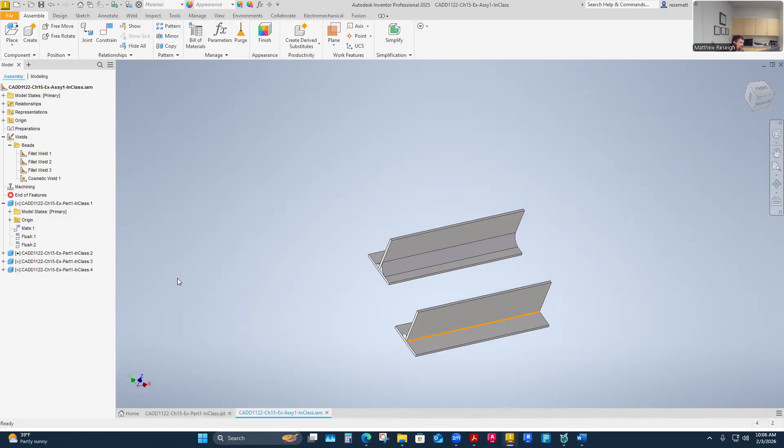But the weld calculator would be cool, because I could just bring an assembly in here and apply the welds that I'm going to do, and then calculate the volume of welding material I need to order. Even though I might not save that, I could use a weldment for an analysis reason, even to check strength and loads. So I could see myself doing more of a design refinement: bring my already assembled assembly in, apply the welds, calculate weld stuff, and save that as a Weldment file. It's mostly for calculation purposes, not necessarily for my prints. So yeah, good.

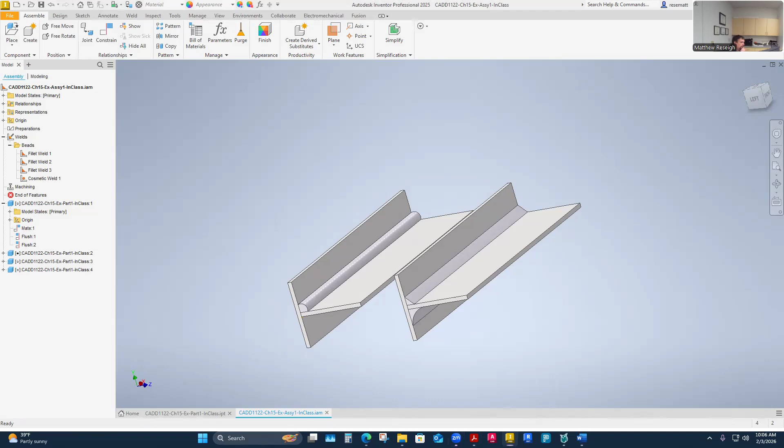As a weld, I think I can insert it into a Weldment. Yeah, because you can. That's a good question. You can insert.